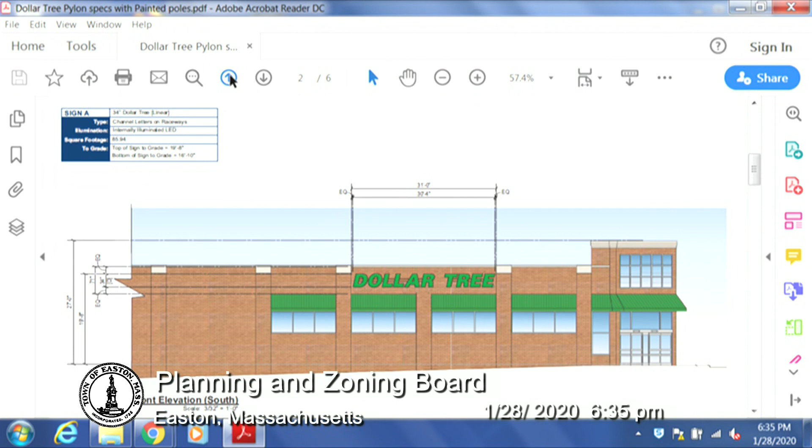Next page. And the following. One more time, sorry, details? One more time please, there we go. There's what we're calling the monument sign.

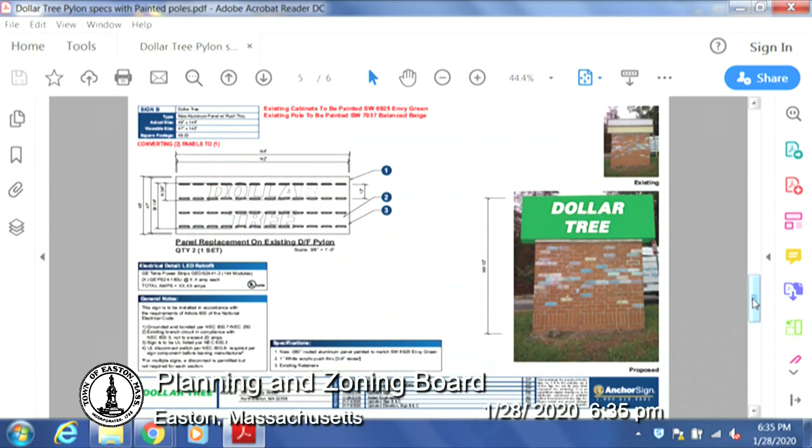So the monument sign is an 080 aluminum face, which is a pretty thick sheet of aluminum, with a 1-inch acrylic push-through letter. It'll achieve, again, that dimension the board is looking for. This too is internally illuminated with the same spec'd out green vinyl. Or actually that's a painted face, I apologize, but it's still that Sherwin-Williams 6925 Envy Green.

And the next item is the pylon, which the cabinet is black. It's going to be painted green to that same Envy Green with, again, another 080 aluminum face and 1-inch acrylic push-through letters. It's 169 by 45 inches tall, 23 feet up in the air, so.

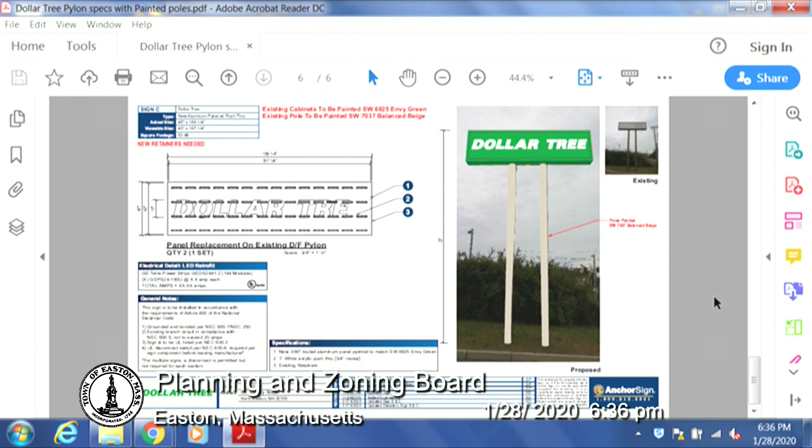So the green's opaque in both cases, right? And the white is what illuminates, right? Okay. Questions, anybody? Anybody in the audience?

Anybody care to make a motion? I'll make a motion to approve the 501 Foundry Street signage now that we have 1-inch acrylic letters. Second. Any further discussion? Hearing none, all those in favor? Motion passes. Thank you, sir. Thank you.

All right, continued public hearing, 7 Glen Road. Anybody here? Yes. And I need to recuse myself. Let's be quicker.

If I'm not mistaken, we were pretty much wrapped up last time. We were. The only thing left, Mr. Chair, was a comment from the fire department received the night of the meeting, so we didn't have a chance to resolve anything. So we met with the fire department and revised the plan.

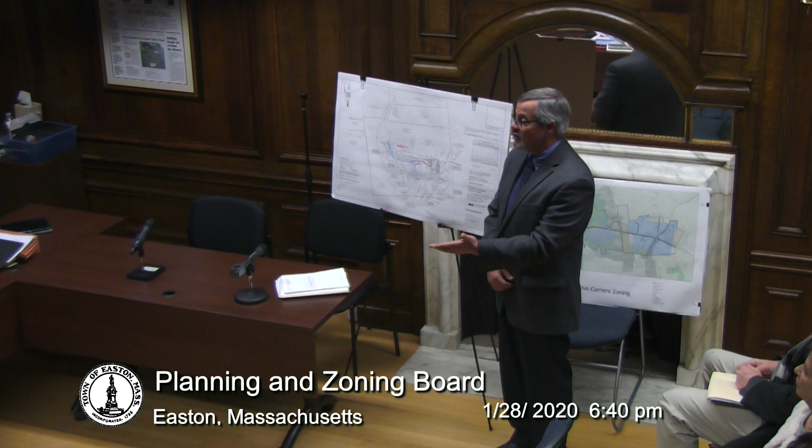Anybody on the board have questions or comments? One other comment, if I could. Scott, you're familiar with the street naming standards—I'm sure this is going to continue being called Glen Road, but if you want to call it something else, you should ask the board. We've called it Glen Road Extension. I don't know if we need to call it that or just continue calling it Glen Road. Before you go for a development permit, you should get a street number assignment from the Board of Assessors, and they may ask—they're not big fans of 'extension.' Probably, and when we talk to the fire department, we'll likely just keep it Glen Road. That would make it easier, the ties are already there, they don't have to change labels or have any safety ambiguity with the extension. That would be fine, thank you.

So the width of the road leading up to the driveway, that's 14 feet? Right, exactly. And the radius you're showing, that's the one that's been approved by the fire department for the turnaround? Yes.

Who would like to make a motion? Do we have to close the public hearing first? Yes, we have to close the public hearing. So would you like us to close the public hearing? Motion to close the public hearing. Second. All those in favor?

I guess motion to approve the proposed waivers on condition of the roadway conditions that Andrea proposed, as identified in my staff report dated January 28th. Second. Any further discussion? Hearing none, all those in favor? Motion passes, thank you.

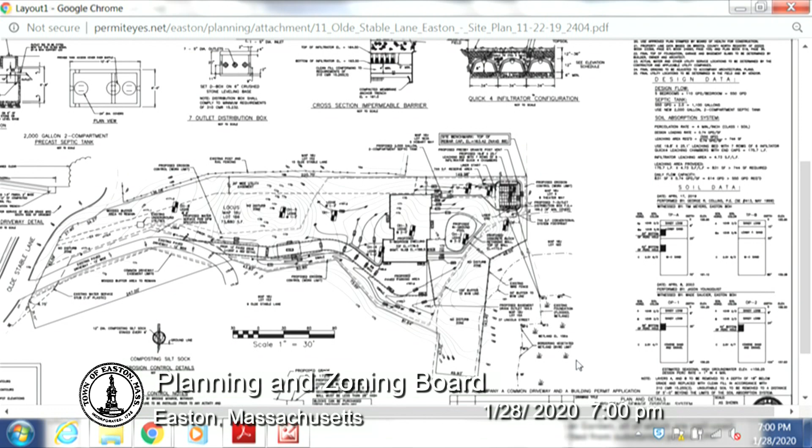Right, but see, if you look at the site plan, if you move the house as far west forward as you could, given that the backyard of this house is 16 feet above the average finished grade of the gardens. It's right in the middle of the lot, where there's a hill, all those circles facing around each other, that's a high point. If you put the house all the way, you're still gonna see it. There's no place on this lot where you're not gonna see the house from the gardens.

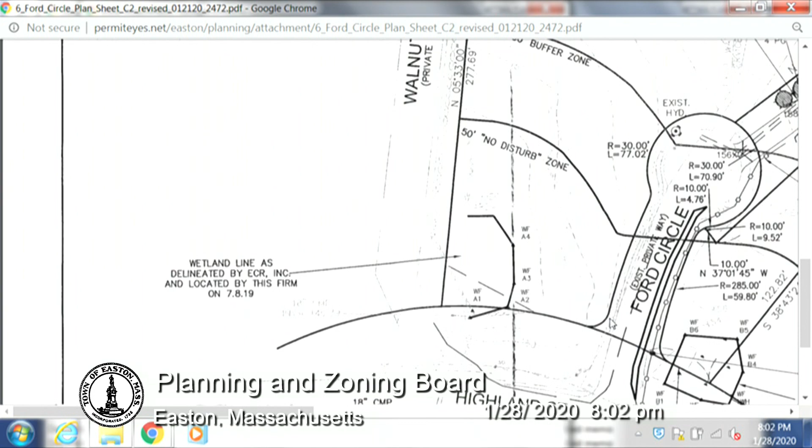What is this — can we put this plan up on the screen, or do we not have it? Where is this infiltration — so this infiltration is within the... it's right on the left-hand side, just off of the riprap. In the design, the infiltration trench was on the outside of the 20 feet, and so the way it got constructed was closer, perhaps.

So you're saying that condition is all the way down on the left side? Right. And that's the maximum width you can pave, what, 14 to 15 feet?

Yeah, what we need is the infiltration trench. So it was in the original plans, they just built it in the wrong place? Right.

And there's no room to pave a little wider to the right? Well, that's what he's calling out, the most you could pave, it sounds like. Yeah, because we're going from 13 feet of pavement to 16 feet of gravel road, so the driveway is going to be wider than the roadway. It's the way it is right now, the original. We could, I have it.

Beef up the right side, more than the 3 feet we've got shown. We could, you'd just have to fill it in more. What's the most you could get? Is that what's holding you back, if they don't have to fill it in? Can we get 18 feet total? Yeah, we could add 6 feet to that right-hand side.

Because we've allowed, in similar conditions, 18 feet of pavement, and I would prefer to do that than go to a wider driveway. A street should go to either the same width or wider than the driveway. It would, right, especially with the existing house.

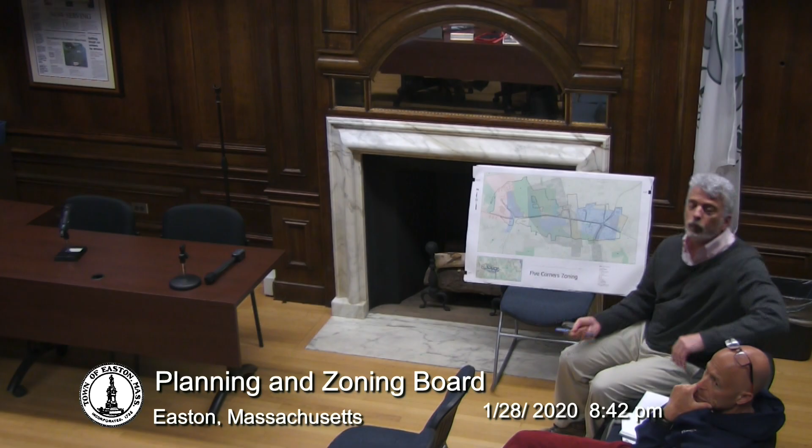I appreciate things. I think it's helpful for the consultant to hear directly from folks who are potentially impacted, not just the residential, the business folks as well. And what we'll endeavor to do is to get the word out to our folks so that they stay informed and stay involved in the process. I appreciate that. So if you want to try to read this, you can, or you can just wait and get a full presentation.

Yeah, well, as you know, Dale, I sent this to you as soon as I had it. Right. And this is, all our meetings are open public hearings.

We'll be working on this at every meeting we have. We meet every 2 weeks, although we have an extra meeting for this on the 3rd. And that's why tonight we probably seem a little disjointed, because unfortunately, like most people, we like to get things a week or two ahead of time so we can properly review and digest them. But we weren't allowed to do that. This just came in, so we really haven't. If I had my druthers, I would have just talked about this as a board tonight so we could present better to you guys. But at the same time, at least you can hear what we're thinking.

And I'll just say this: forget about the quantities for a second. I'm on a few boards in town, and I'll go on all night long, so you guys can just tell me to be quiet. But all I'm trying to do is explain to the public on TV what we're trying to do. And we, or at least I think we as a board, for the last 5 or 6 years, chose creating these walkable neighborhoods, because we really do believe that's where we're going in the future.

There's no way that our kids' generations are going to be able to spend on houses what we have. You see in Easton right now, a spec house, down and dirty, no bells and whistles, is $900,000. And that's because of the price of land and the price of building, as building code continues to just evolve at a very aggressive, expensive clip. So we're trying to, and then you think everything's changing, everything has been Amazon Prime, and it can't just be, you only have so many restaurants, right?

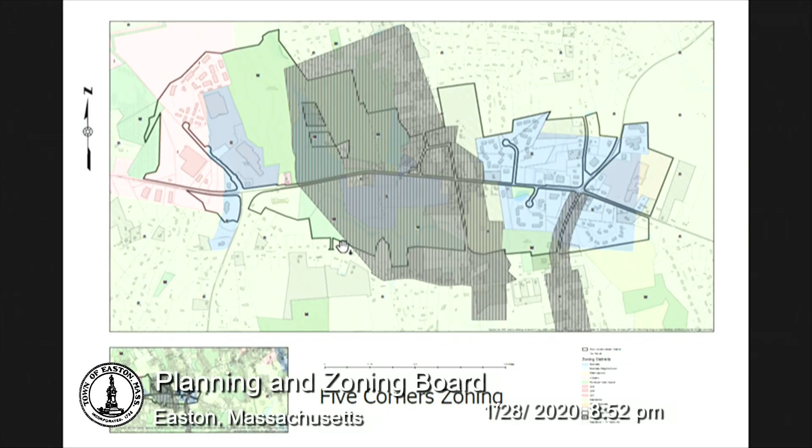Is this brown, is this dark line? No, that's not what we changed last time. So do you want to mark on that plan, because she does not have that? We had that photo - only one - oh, I gave that, yeah, let's - yeah, one. So what is that?

That's the proposed district, there's nothing final yet, but remember when I talked about how - yeah, 'cause the PDF didn't identify what the boundaries of the districts were. Do we have that? So maybe that was part of the confusion on our end. Do we have that in?

Yeah, I gave you copies of that last week. And is that something that can be publicly available as well? Yeah, I'm looking for it. Okay, so the PDF that you have isn't correct - well, it doesn't define the district. You should have a map. What I sent you - she didn't attach a map. Right, her map was gonna be based on this.

So, my apologies if I'm - you're misunderstanding, but I saw it talked about the residential transition district, and then I see what's zoned for residential within the district, but you're looking at a more narrow confines. Okay, correct. The red outlined areas is what matters.

We might have it, but I'm not sure where it is. That's a big thank you.

So that way I know what we're talking about. Okay, the boundaries are really the most important thing. You think?

Come to the next meeting. So, do you guys have any comments, questions, anything at this point, or do you want to wait till the third? The only... yeah, we can wait, I guess.